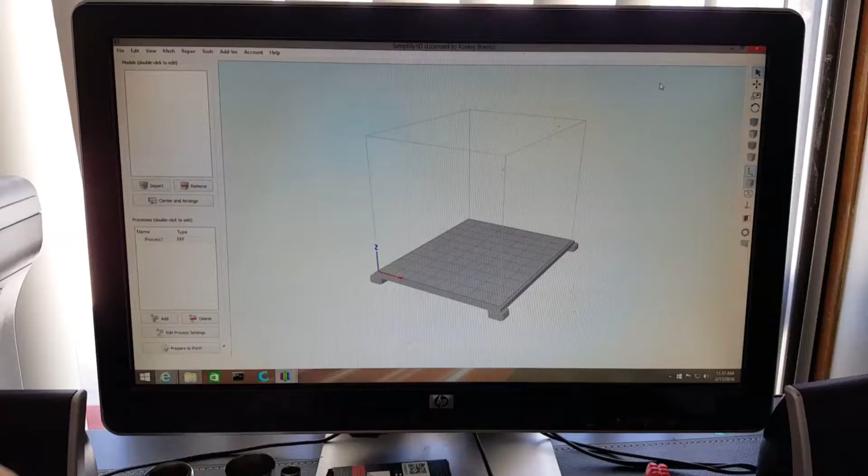Yesterday I was thinking about what video I wanted to do. I didn't want to do another filament review because that's not all I want this channel to be about. I got a request from Mike Munn, I believe, don't kill me if that's wrong, to do a video on rafts, which I think is a good idea. I haven't used them as much as I've used brims, which I can briefly discuss too.

But they are helpful. When you need them, they're amazing. So yeah, I'm going to go over that.

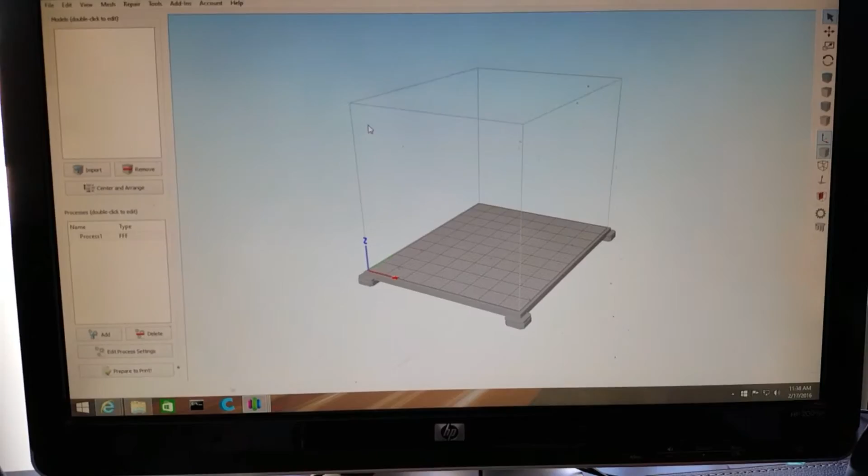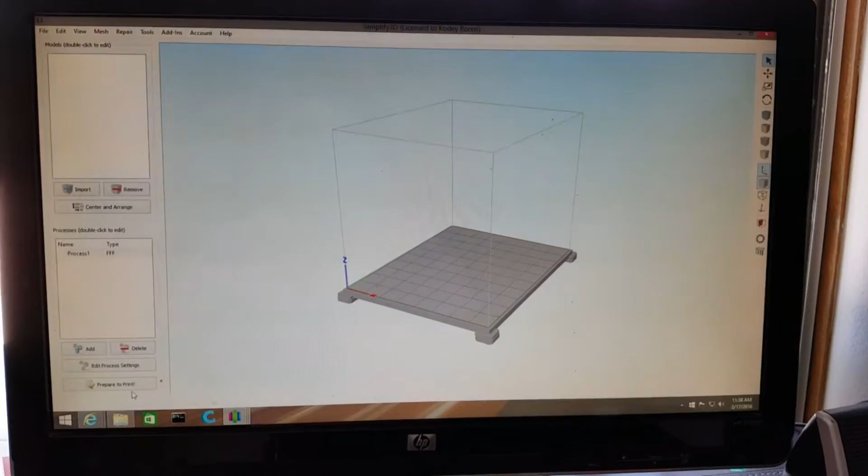First I'd like to start off, if someone's watching and they don't really know what a raft is - it's more or less a piece that goes under your print on your bed, and it helps, especially with ABS, actually stick to your plate. I'll show you what I'm talking about here.

There's a good example. Simplify3D did a good job on a tutorial explaining this. First you have your skirt, which I normally use every time. It helps prime the filament, getting it ready to start printing so you'll have a better chance of getting a nice clean first layer.

Then you have a brim, which is like a skirt, but it starts right at the edge of the part and goes out for however many layers you want. That will help with wider pieces or anything like that stick.

Then we have a raft, which is kind of like a brim, but it's built up more, and it actually builds a surface onto your build plate, like right here. It starts building this raft, and then your printed part actually sits on it.

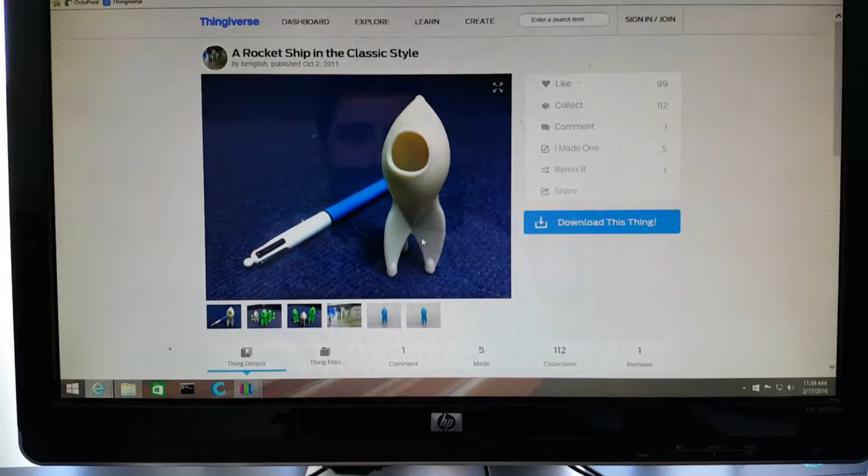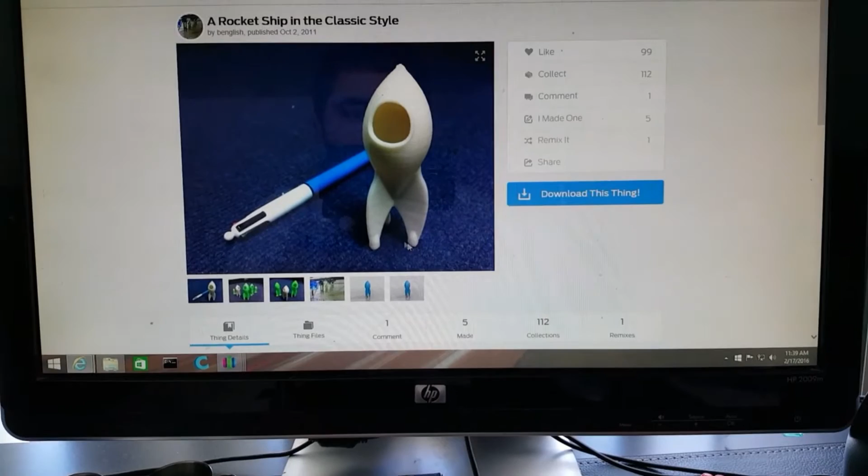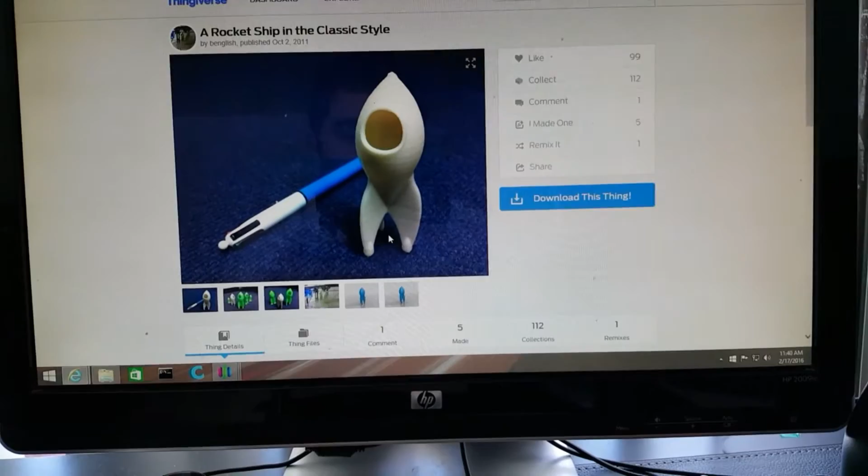For this example, I'm going to use a rocket ship in the classic style. I chose this because it has really small points at the bottom, which is a good example to use a raft, since you're only holding on by such a small point or 3 points, it likes to pull off. You have a better chance of it pulling off because you're only holding on by these 3 points.

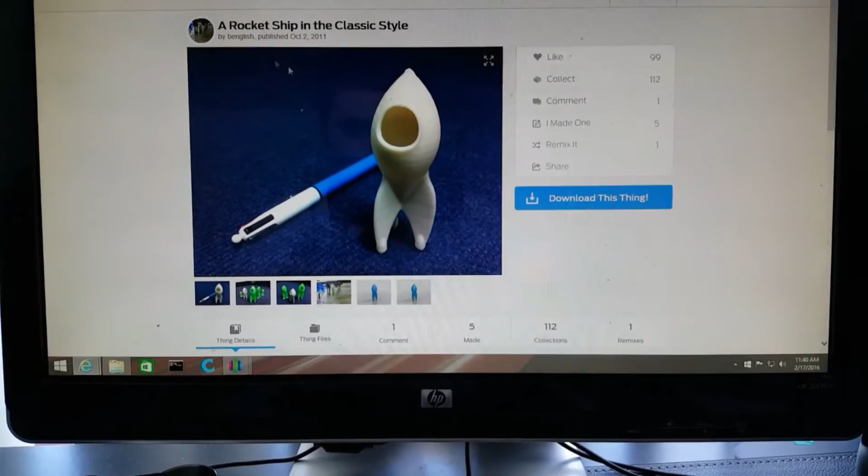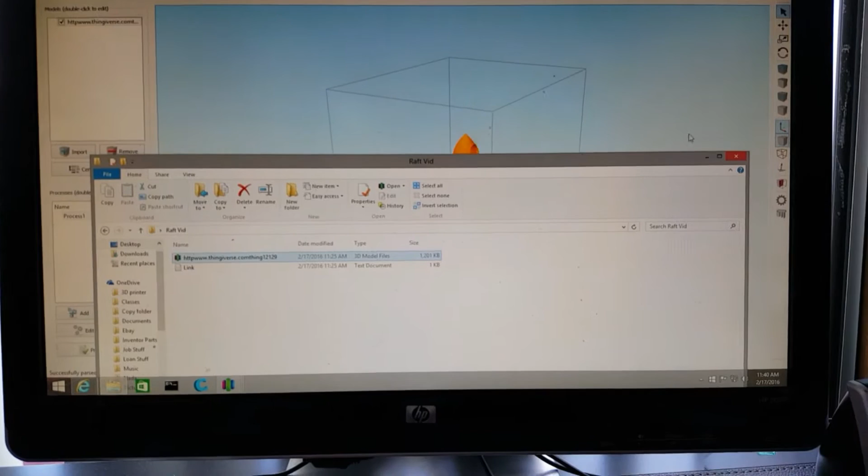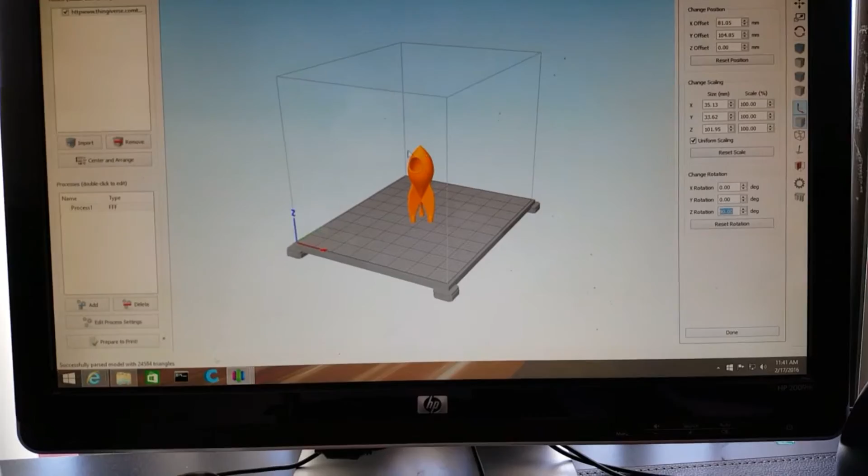I'll go into Simplify3D, which is what I've been using with my MakerGear, like I discussed in a previous video. I'm going to take the file, drag and drop it on there, and then rotate it along the Z axis by 90 degrees. I did that because my cooling fan is on this front side, so anytime I have an overhang, it's good practice to get the overhang in the front where your fan is, because I printed this aftermarket fan shroud right here, and it works really good.

Then I'll go into Edit Process Settings - I guess I could use a screen recorder for this, sorry guys, but just bear with me right now. Since they already have profiles, I'm on the MakerGear M2.

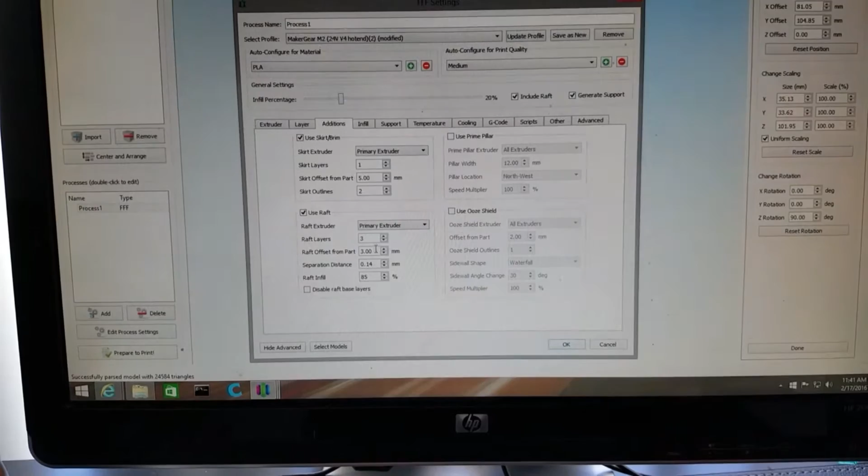Then go to PLA, and click Raft, include Raft. I believe it's in Additions - you can change what raft layers you want, what kind of offset you want from the part, separation distance, and also the infill.

If you want more on that, I don't want to make this video too long, so I'll include the link to this Simplify3D example. They go really in depth into it, and this isn't just for Simplify3D - this is really for any profile, like Repetier or Cura, whatever you're using, it will work. They're the same settings, just different software.

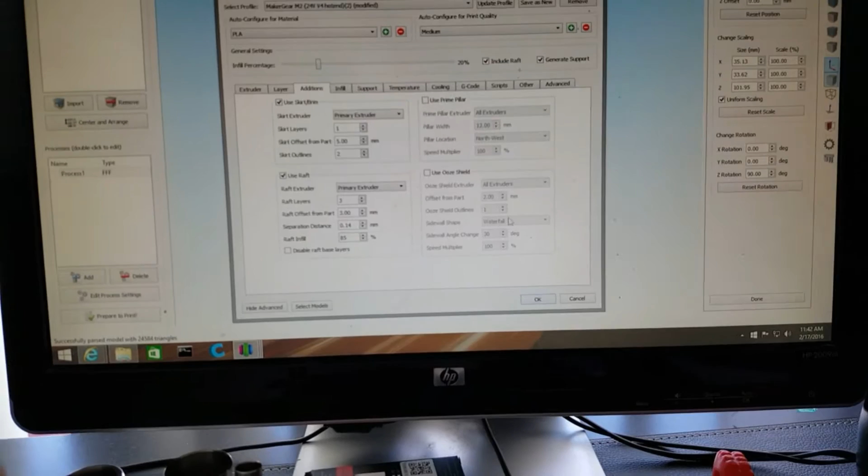Okay, so anyways, back to this. So then 20% infill - I'm doing this on the fly, so just bear with me for a second.

Okay, so as you can see, I have a skirt too, probably don't need that. If I can actually work this right - but if you can see that...

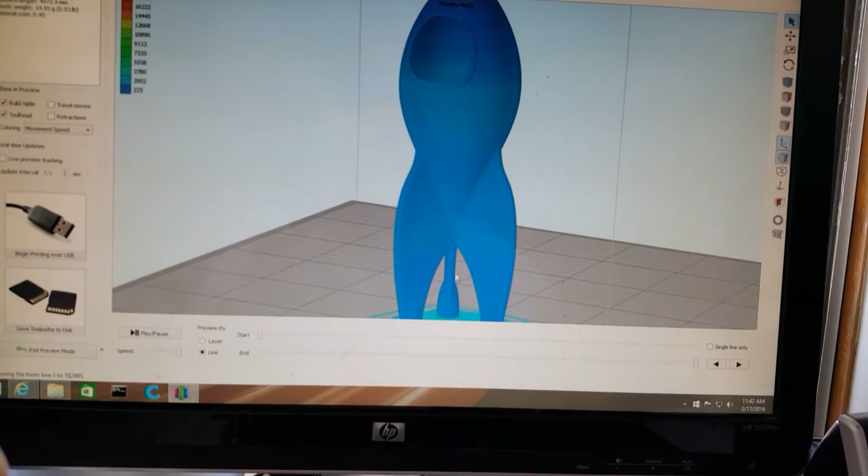Okay, so see, we got a raft right down there. It's going to print that first. If you look really closely, you can see that it's almost like support material there, and then it actually prints a flat base on there, and then starts your print from there. Let me just make sure.

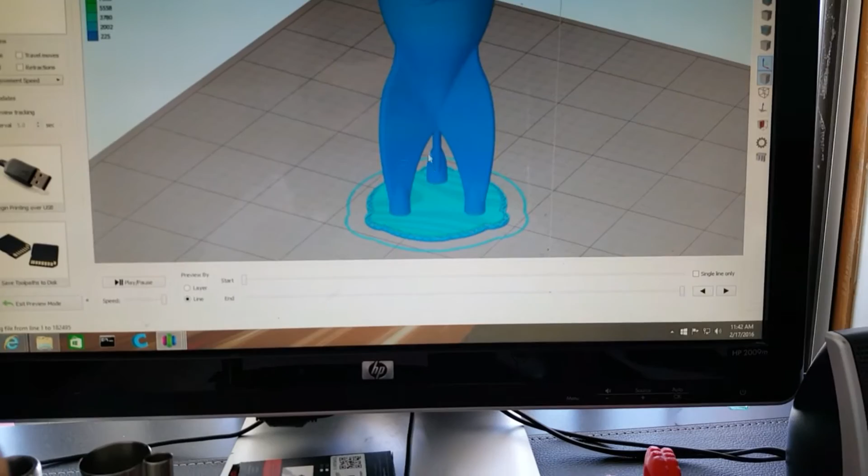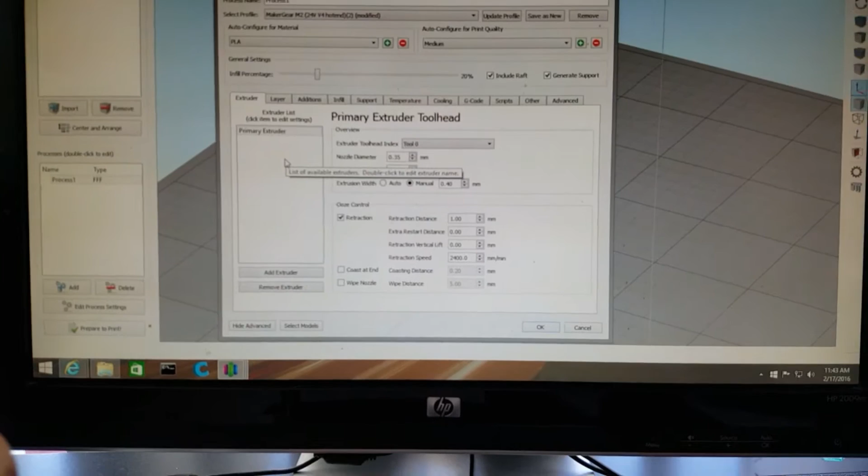Okay, there's not much going on here. I'm going to actually change that infill real quick. Sorry guys, like I said, I'm doing this on the fly this way. I'll bring up stuff I might not have brought up, just telling you guys. Sorry, I also see this video is going to be kind of long, but at least I'll have information about it, and you guys can skip whenever you want. So I'm going to change the infill. Oh no, it is rectilinear, okay. 20%, yeah I'm good with that. Bump it up a little bit.

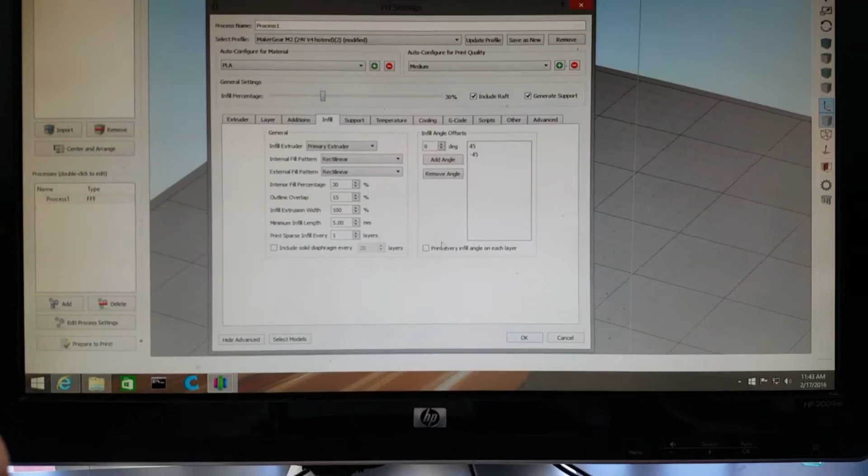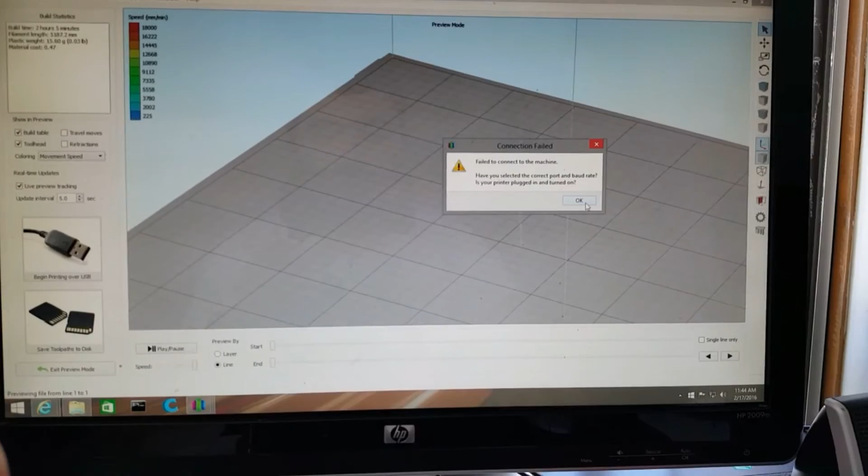Okay, so let's prepare to print this. Sorry, one second. Okay, there we go, and I'm going to print over USB. Awesome. Okay, I'm an idiot, one second. Okay sorry guys, I was having a little issue.

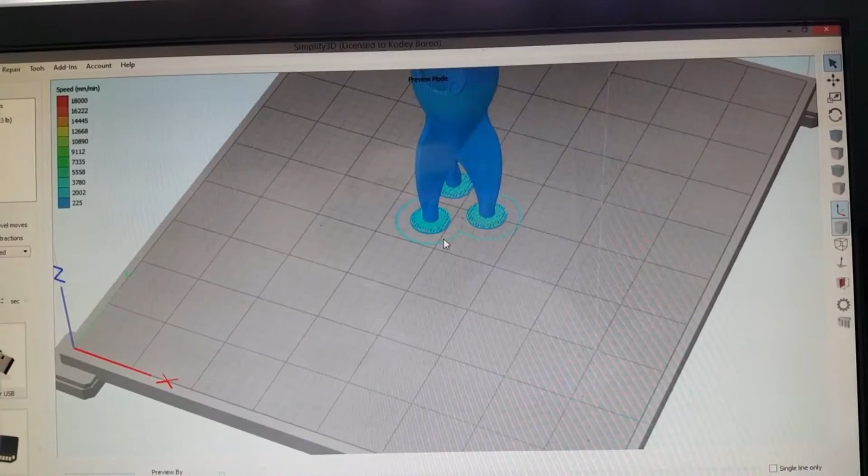I accidentally had supports on there, and you don't need it for this model, so it actually makes more sense. Now you can actually see there's 3 little pads, not the big one, because there were supports in here, and supports in here, and you really don't need it for this model, so it was kind of overkill. So now let's print this. Should work.

And it should be pretty close. Yeah, I already heated up the bed beforehand, the extruder just cooled down a little bit.

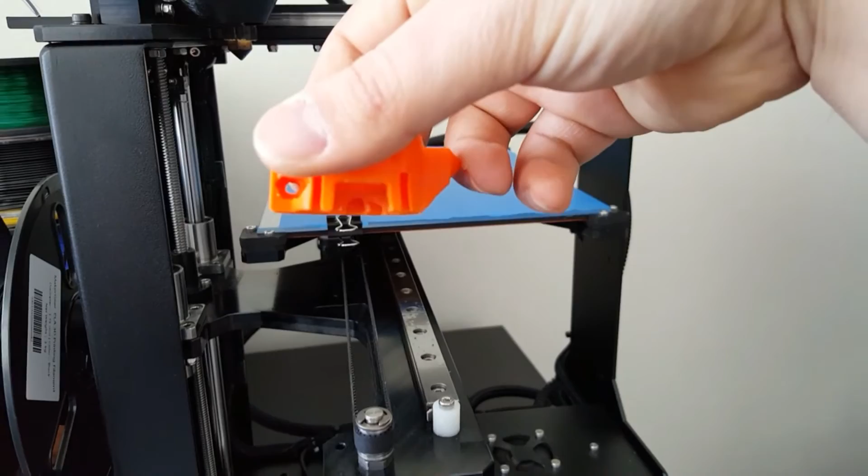The other good thing I forgot to mention is the reason you do that, besides when you got a small part like that to help it stick to the bed, you can also help stabilize models with small footprints, like this one, a nice strong foundation to build on. Or like ABS, where it likes to warp. I can't really see it, but there's a little warp right there. Helps with that a lot too.

Okay, so now it's gonna go, and I'm not gonna make you guys watch the whole print because it's gonna be a little bit, but I'll get back to you at the point, you know, after it's done. So it's going, right now it's doing the normal skirt like you guys are probably used to.

Okay, and it's gonna do the bases. So it's gonna go slow on the first one because you don't want to whip it around. And if you can see, it's almost exactly like a support material in there.

By the way, I'm using just regular MakerGear Black PLA. Love this stuff. I ended up having some issues with the colorFabb, I need to still work on the extrusion multiplier and all that. I'll make a final video for that though. But this stuff, I've already gone through almost 1 kilogram, and I've only had it for a couple weeks.

It's just stacking up again, over the same exact lines, okay? I don't know if you guys are... yep, now it's going the opposite way. It's starting to pick up speed a little bit.

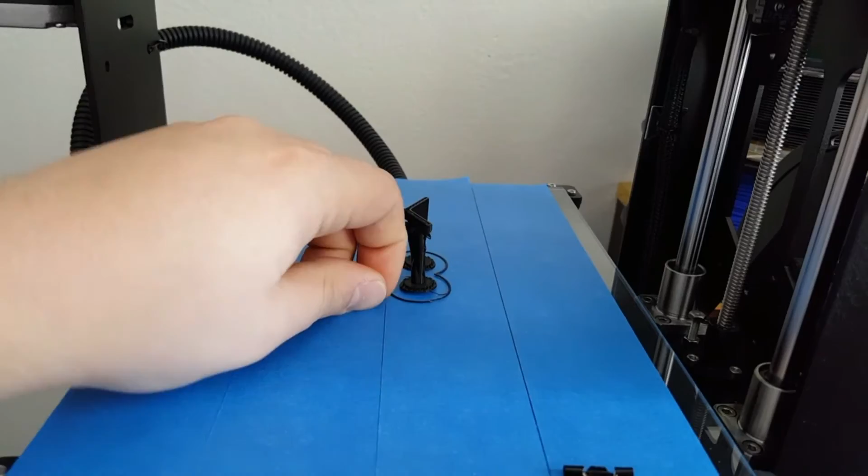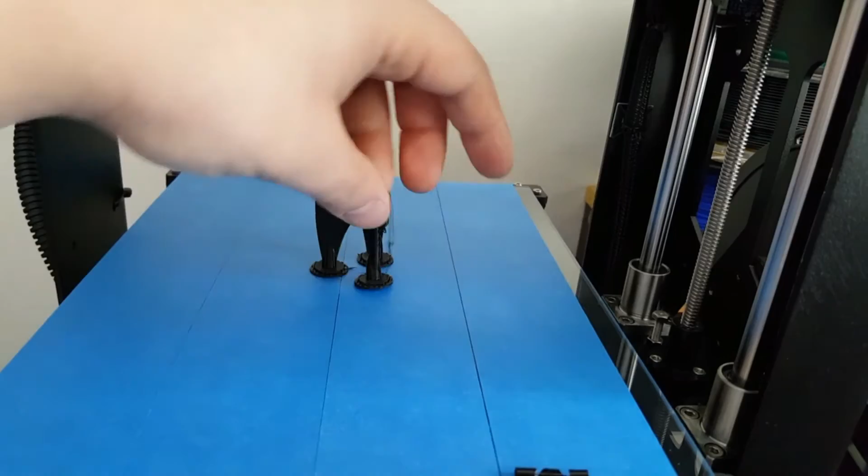Because it's going to be the same process, even if yours works. Hopefully the thing you're printing does work. Okay, well that's already starting to come off. That's pretty awesome. Probably didn't help that I didn't have any glue down. Oh come on, okay, well that's stuck. I'll just take that part off. Hopefully that does not happen, but just kind of wiggle it.

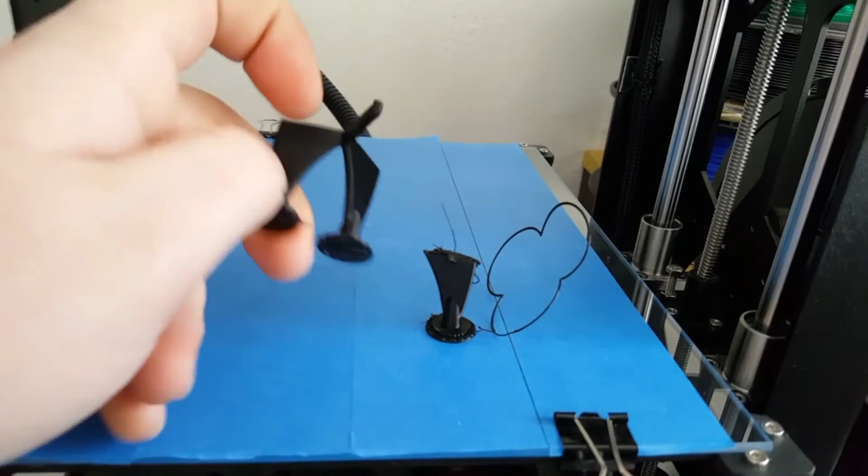I'm just kind of rocking it back and forth. So you'll see, I should take both of these. Here, wait one second. There we go, take this and that. Okay.

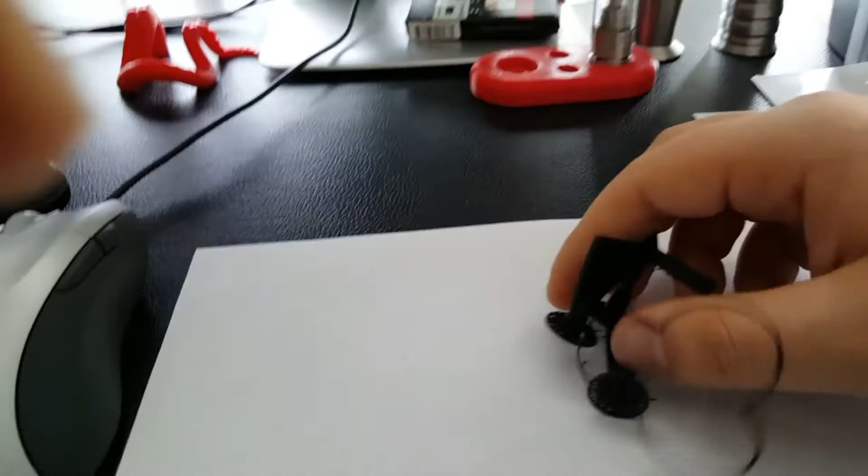Okay, well, as you can see, I'm going to try to do this one-handed, because I do not... Oh alright, I can try to adjust this real quick. Sorry guys, I'm not really prepared for this. Not very professional, I know, but hey, at least it's for real. Well, just bear with me.

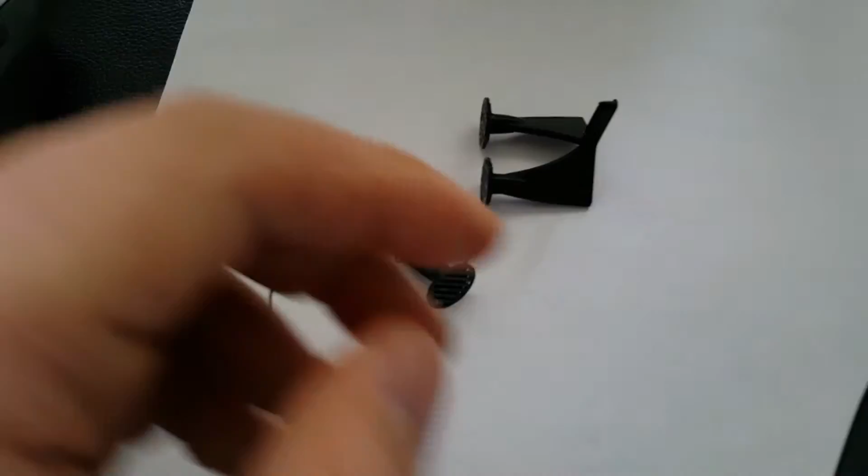Okay, so if you can see, try to get this to focus a little bit better. There's that lattice I was talking about. So then it just bent off, pried it off, and there's a little bit of—sorry, let me, trying to focus here. So there's a little bit of goober on there, I guess you can see.

You can just peel that and scratch it off, okay? And I mean, it just popped off, which is kind of what you want. If it's really sticking and you need to pry it off of your raft, something's probably wrong there. And I mean, it's still a pretty good finish on there. You know, all right, much better than not getting anything else done.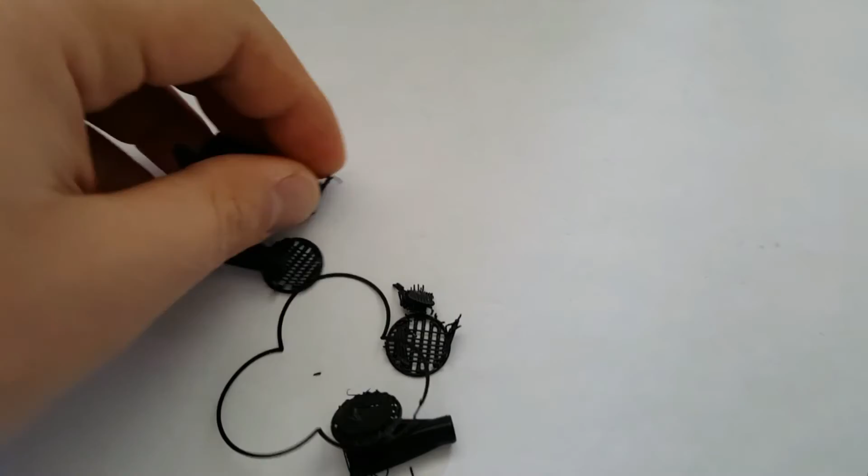Okay, just gonna show you kind of. Okay, so now it's not gonna be perfect, but as long as it can pry off pretty easily. Once again, I'm doing this one-handed guys, so like I said, I can do it one-handed. I guess that'd be a good indicator. Okay.

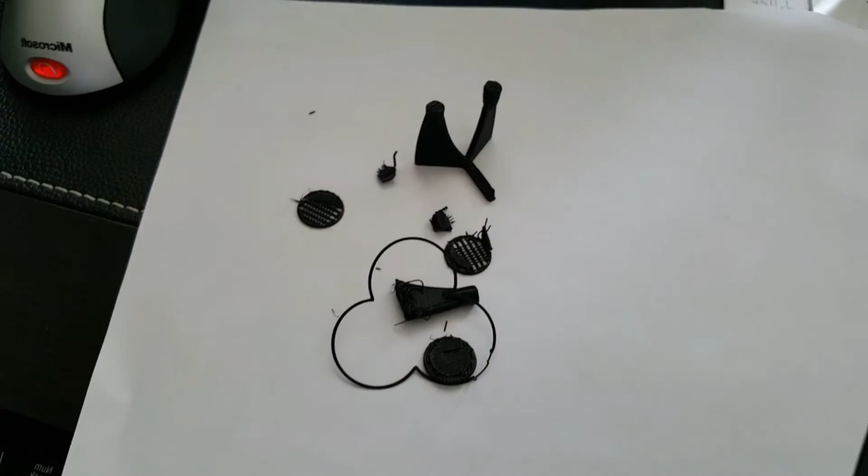Sorry. Like I said, sometimes you'll get a little goober on there, and you can just peel it off. I mean it's not bad, or like scrape it off. The only time I've actually used a raft officially for something was—sorry guys, one second. Oop, dropped it, nice, okay.

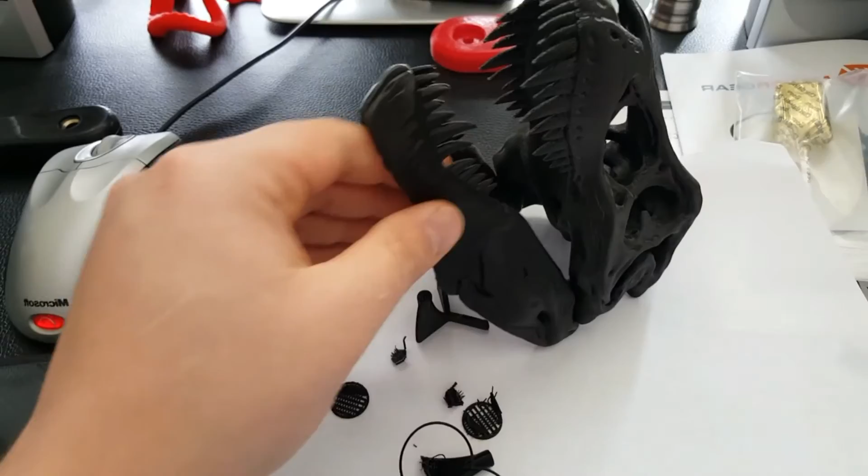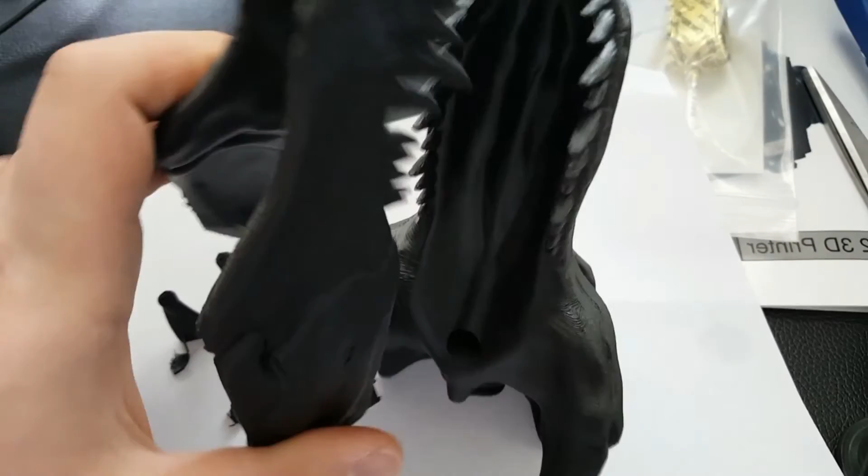Was on this guy, also made with MakerGear PLA. No supports or anything. Came out pretty nice. I mean, one of my first bigger prints, but I used it, which I guess you really don't need it, but actually on the part you would not think.

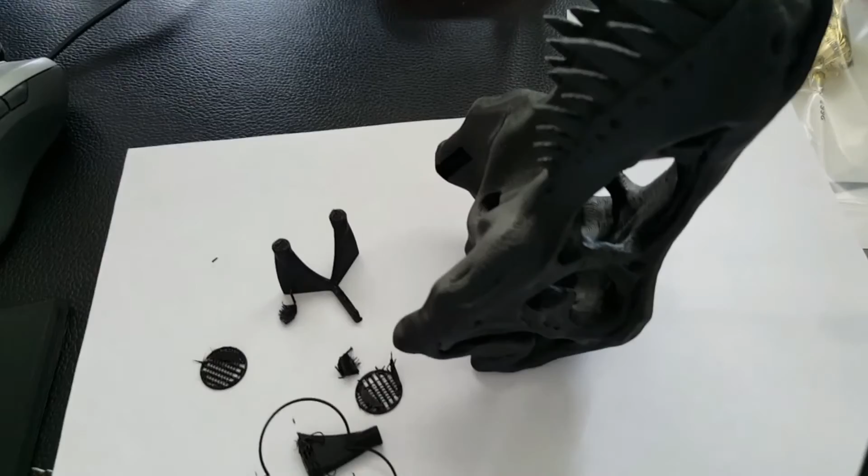So there's this, which prints on this back surface right here, which is pretty impressive right there. So that would be something I guess you could—well, this one was the one I did, and as you can see there's still a couple little things on there. I didn't fully clean that up yet, but...

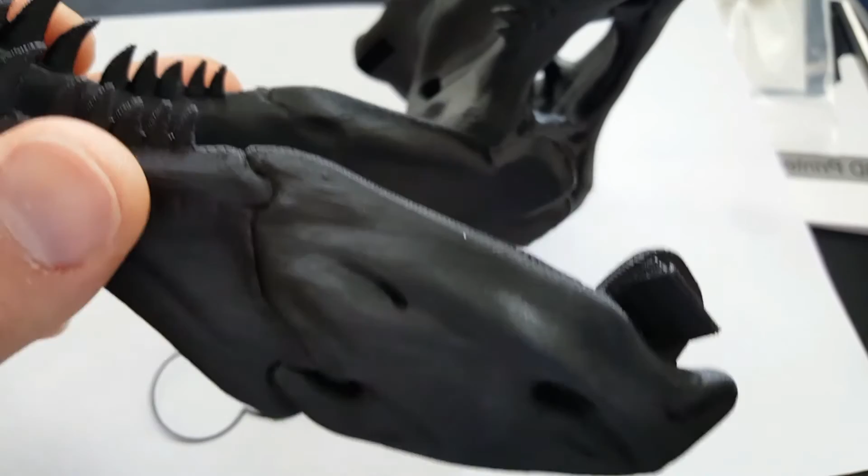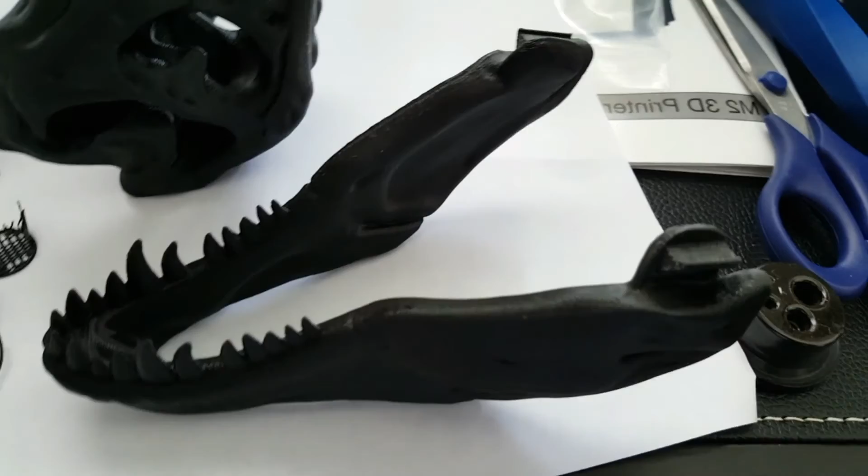0.2 layer height. So obviously you can see that 0.1 would have came out a lot nicer, but I mean, I was really happy with this. Little overhang that was before I got my cooling fan on there. Probably be a little bit better now. But yeah, so all good examples of when to use a raft.

So obviously it didn't work out too well today for me, but hey, that's okay. And this guy just goes on here. Like I said, I was pretty happy with this. I'm not trying to jump subjects now, but yeah, so that's the only time I've actually used a raft. But you know, I just thought I'd fill you guys in, you guys had the question, so there's that.

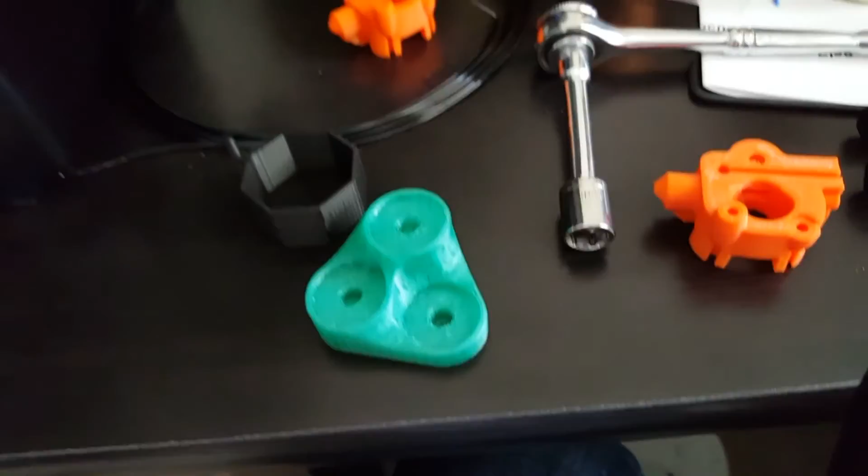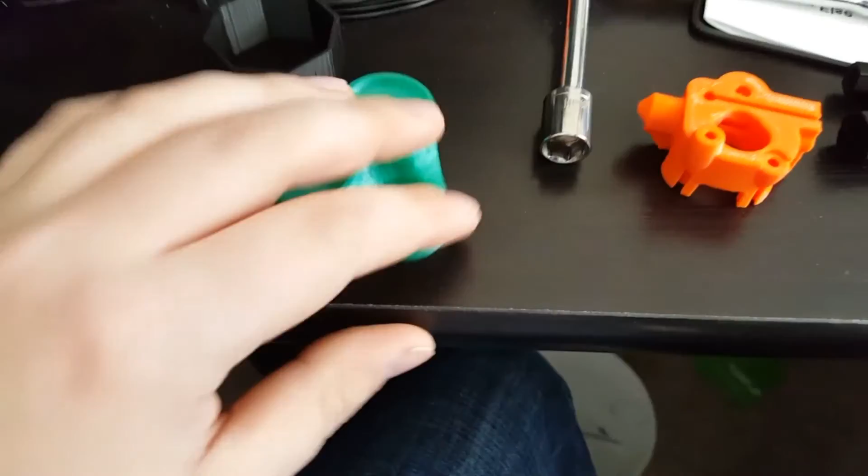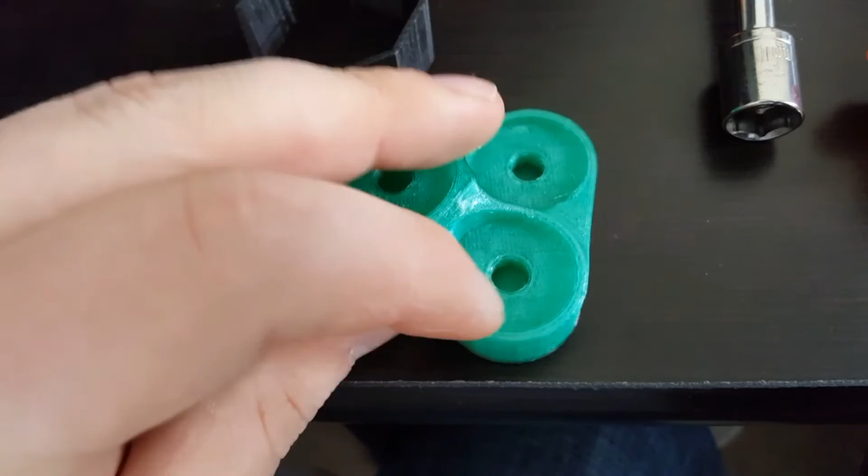Here's the first thing I fully printed that wasn't like calibration. Came out pretty nice, I like it, it's a good color. I still have a little bit of webbing in there, just a little bit on the retraction settings. Gotta change, need a little bit more retraction, so it quits. It was building up on the nozzle. But yeah, so that's one thing.

I got applying—probably can't see it on here—but applying polyimide or Kapton tape. That's one, because I got to put that back on after I ripped it. That's why I'm using blue tape right now. And then there's also a zebra plate I got, I do plan on using, pretty excited about that, haven't messed around with that. And then lastly, I got a piece of PEI.